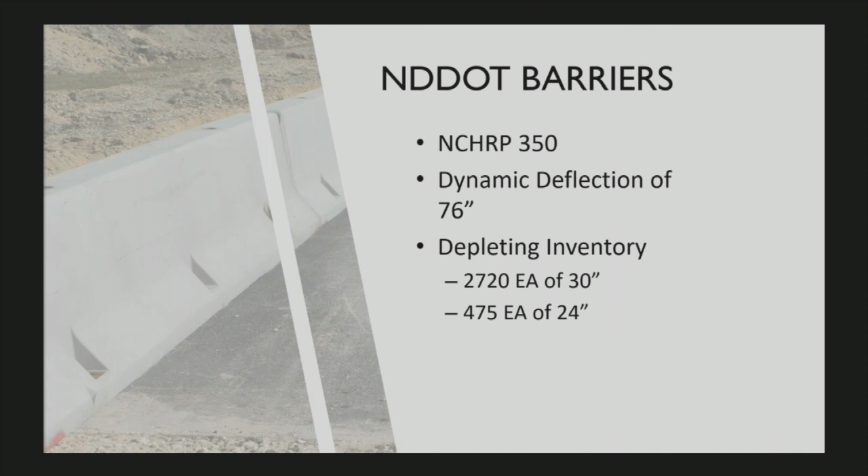In 2020, there were approximately 30 projects that had barriers on them, ranging from just a few per project to some that had almost 350 barriers. So when we started looking at this, we were looking to see what was out there. There were over 50 different types of MASH portable barriers. There are concrete barriers, which are much more durable. They're typically heavier and a little harder to transport. Generally they do have less deflection for the freestanding type, which is basically no anchor at all. Most of the MASH tested ones were F shape, but there were a few New Jersey shape ones, and currently what we have are New Jersey shape.

There are also some steel ones out there. They're also pretty durable, but they're typically lighter and much easier to transport. You can get quite a few more of them on a truck. There are also some plastic ones, like water-filled ones. They generally have limited use, and if we're going to use them later into the year, they would need some kind of chemical additive to prevent freezing. There's both proprietary and non-proprietary, but the majority of the systems tested were proprietary. Anchorage varied from full anchorage to partial anchorage, and also freestanding, but the majority tested were anchored to limit the deflection.

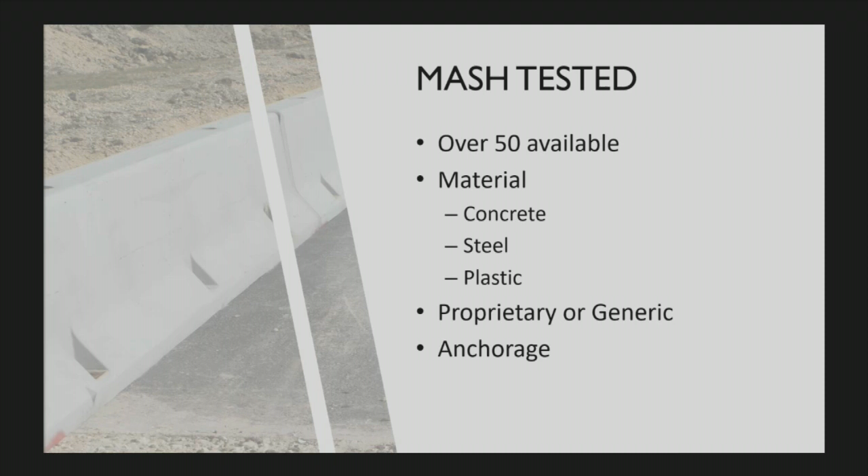Because there were so many, we had to come up with a point system to narrow down the choices. We came up with some target criteria. For width, we were looking to get the barriers around 24 inches or less. Lengthwise, for concrete 15 feet or less, and for steel 20 feet or less. For deflection, we were targeting around 49 inches or less. Some systems are obviously more, and the anchored systems were obviously a lot less.

For anchorage, we're trying to stay with freestanding ones so we don't have to anchor them into the pavement. We're trying to make sure they're non-proprietary so they can be made by anybody, which will make them a lot easier for us to get. We wanted test level 3 at least, if not 4. We wanted to make sure the barriers could be installed on curves easily, and that if they are proprietary, we could get them locally.

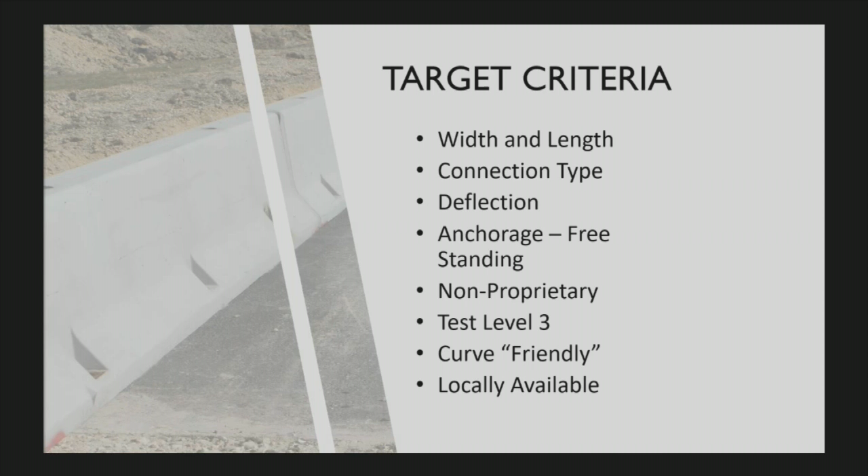So for the concrete options, we came up with 4 options that met most of those criteria. The first option was a J-J Hooks type. This is a proprietary system. It's got an F shape, but it doesn't have any loose parts. If you can see in this picture, they just hook together like hands. So when you're placing these, they need to be slipped together from the top down, slid right on top of the other one.

The width of the barrier is 24 inches, height is 32, and the length is 12 feet. The dynamic deflection on this one was 64 inches, and that was for freestanding. So this didn't need to be anchored down, but they do have potential for being anchored if necessary.

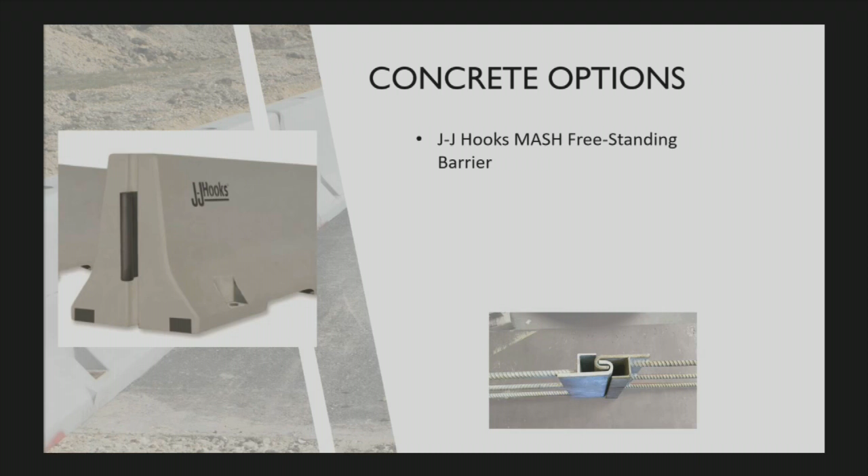The second option was a QuickChange Movable Barrier. This is kind of a special barrier. It's actually kind of made for bigger cities where they have a machine that can actually move them back and forth for changing the direction of lanes, but they also have temporary traffic control ability.

It's a hinge type system, but this barrier is a lot more narrow. It's 18 inches wide, 32 inches tall, and it's much shorter. They're only 39 inches long. But the dynamic deflection on these was 41.4 inches, and that was for freestanding. But this system can also be anchored, and if you anchor it, then you don't need so much barrier beyond the length of need.

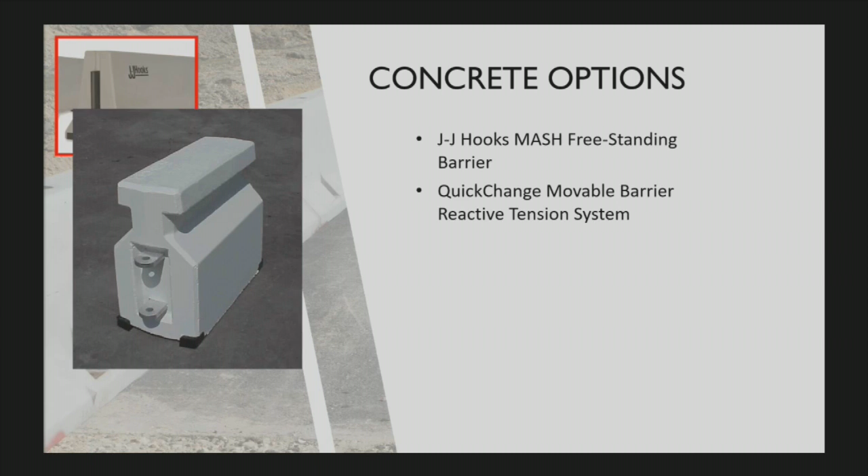The third system was Indiana anchored, and this one also has the J-J Hooks connection, so there would be no loose parts for the connection. This is non-proprietary, however, and this one obviously has to have the plates anchored down to the pavement, but because the plates are anchored down, with a 2-bolt type connection, it's a 13.3 inch deflection, and with 4 bolts, it's only 11.9 inch. And the width of these is again 24 inches, height's 31 inches, and the length is 10 feet.

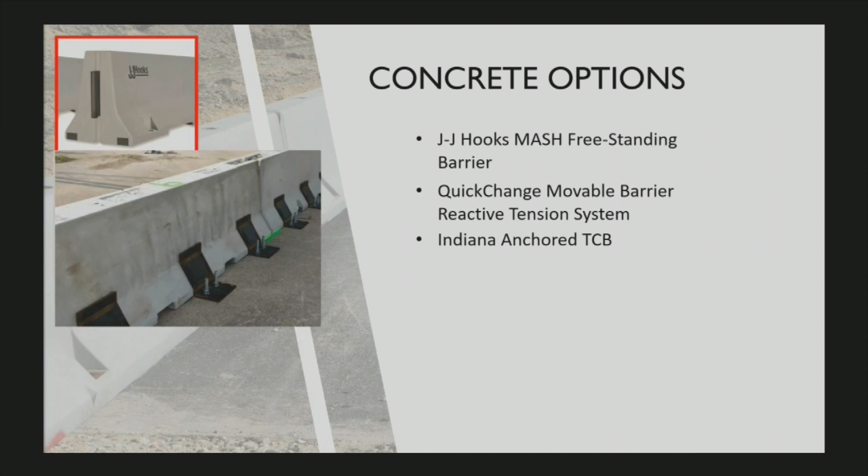The fourth system is pretty similar to what we use now. Instead of a New Jersey type shape, it is actually an F shape. And this has a pin and loop connection similar to what we use now. But this one's also non-proprietary. The width on this is only 22.5 inches compared to the majority of what we have now, which is 30 inches. The height's 32 inches and the length is 12.5 feet. And this was also tested for freestanding with a deflection of 79 inches, which is just a little bit more than what we have now.

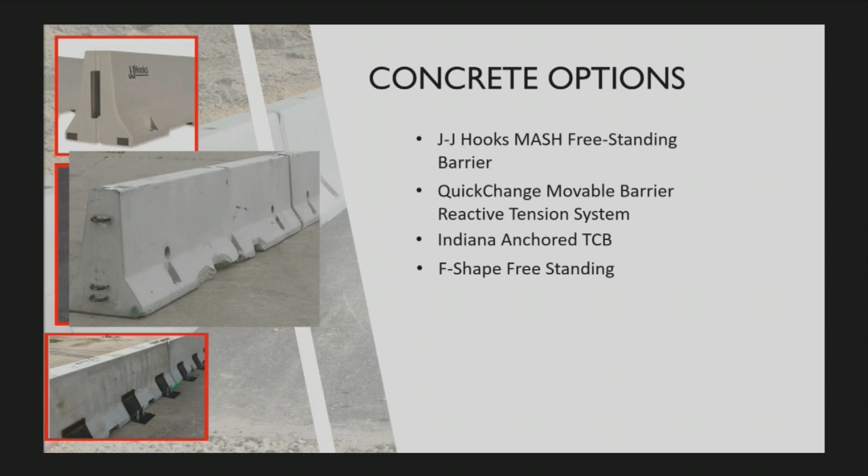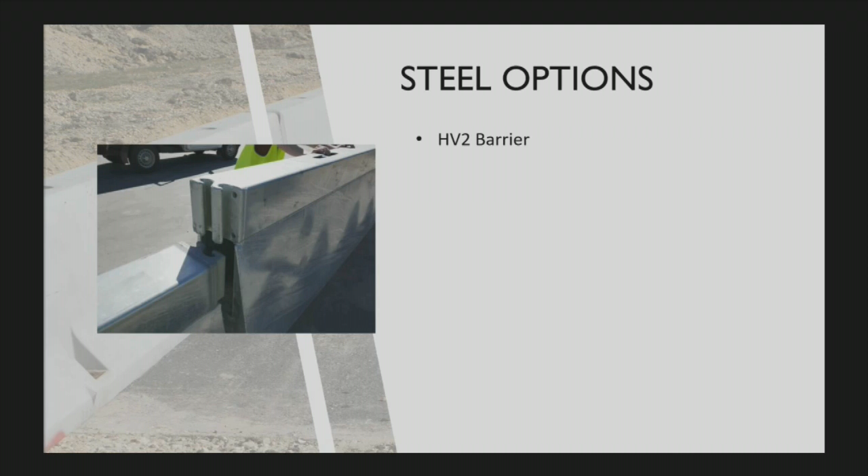We also looked at the steel barriers, and we kind of had 2 that came out. There's the HV2 barrier, and this is proprietary. It slides down just kind of like the JJ one. This is a narrower barrier, 17.7 inches wide, height 35 inches, and this has a length of 19 feet. This is a freestanding one, but can also be anchored at the ends. The deflection was 57.8 inches.

The second type is basically similar to the concrete quick change one. This one has a width of 24 inches, and that's just at the bottom where it sits on the concrete, and then the rest of it's only 13 inches wide. And this one had a dynamic deflection of 47.6 inches, and that was freestanding.

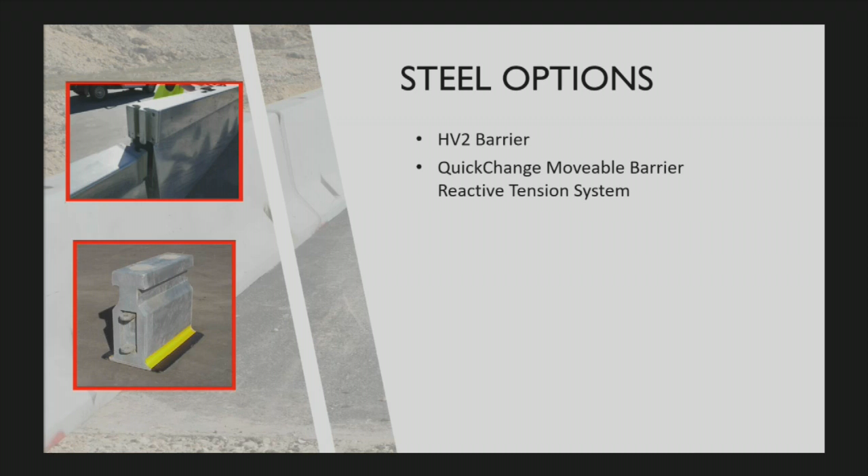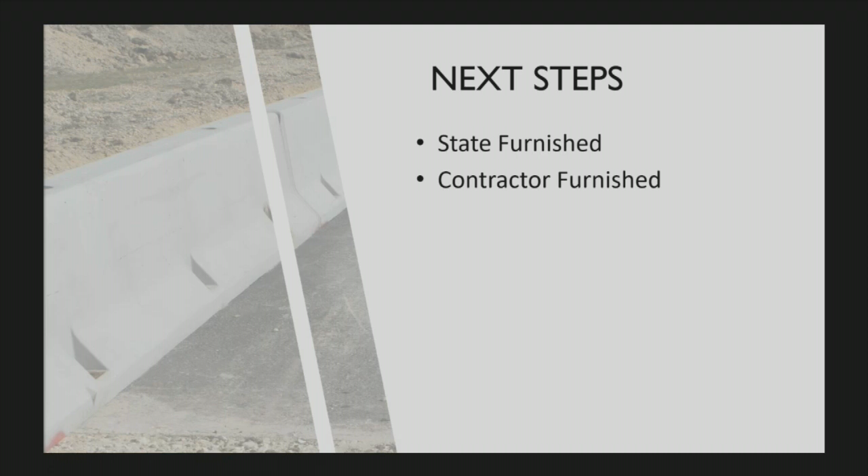So where do we go from here? There's 2 options. We can either continue to do state furnished, or we could do some contractor furnished. And I know we've actually had some contractor furnished on some of the projects lately. For state furnished, the nice thing is we would have some on hand. We could use them for emergencies or any other kind of state needs if we had to. We would have to worry about missing parts. We would have to worry about keeping up the inventory, tracking them, finding out where they're at.

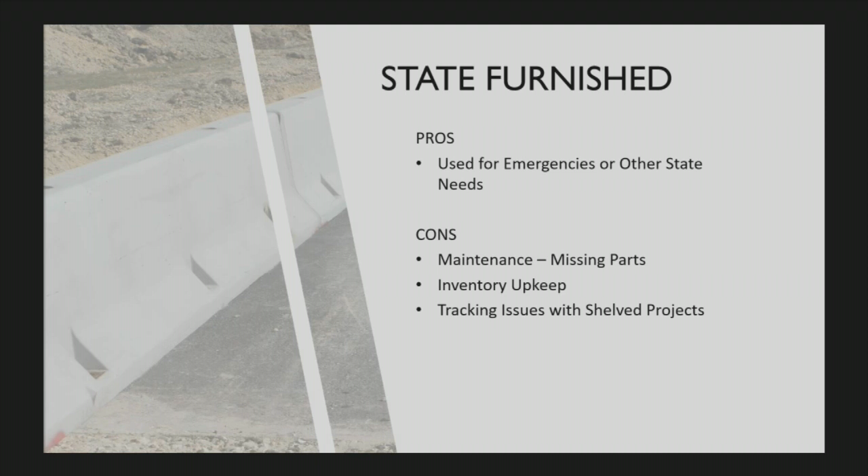And then also if we do shelved projects, tracking could become an issue because if they sit for very long, we have those scheduled to go on that project, but that project is pushed and then another one comes up, then we have to make sure that we have some available. If it's contractor furnished, we wouldn't have to worry about maintenance. The contractor would be maintaining their own inventory. And we could maybe even do tighter specs; if deflection was critical, we could maybe specify a tighter deflection and the contractor would be responsible to get a barrier that would work for that.

The cons, of course, would be that because the contractor has the inventory, we wouldn't have any on hand for state emergencies. We maybe would have to rent them or something like that. The barriers would have to be certified for every project. The contractor might have to have multiple different types of deflections, different barriers on hand, depending on how we specify what we need. And they may cost more. We just don't have enough background. We haven't had enough projects to figure out if the contractor furnished ones were actually going to cost more. So that's kind of our options right now, and that's kind of where we're at.

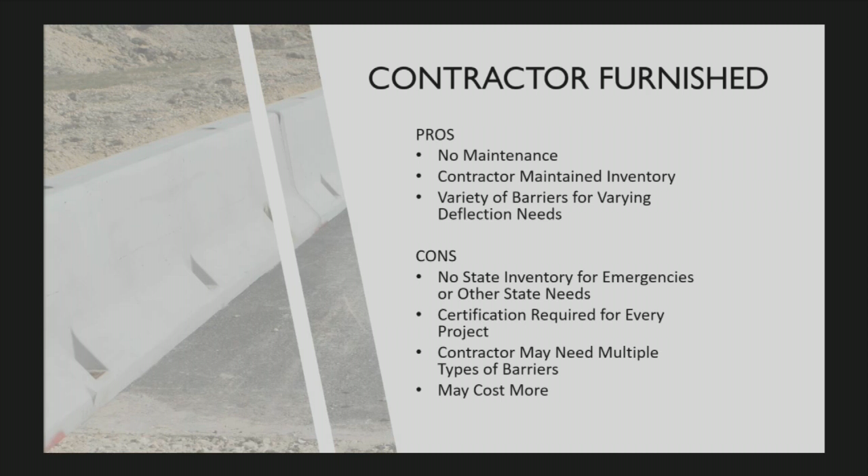Thanks, Travis. We actually did get a question wondering: do contractors put in place these state-owned barriers, or do the district forces put these in place for projects? If they're state furnished, the contractor has to go and pick them up from whatever storage yard they are in. And it could be multiple storage yards and it could be a ways from the project, but yes, they go pick them up and they place the barriers.